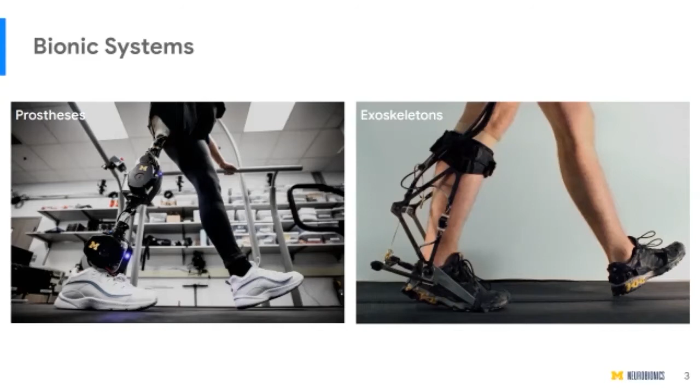Most of the work that I'll be presenting is going to focus on prosthetic legs, but the nice thing about these systems is that they share a lot of similarities in terms of control, and in terms of the types of hardware and software constraints that they have. So although a lot of what I'll be talking about will be focused on prosthetic legs, many of those things still apply to exoskeletons.

The reason I'm super interested in prosthetics is because in the US alone, there are millions of people with lower limb amputations. And these people in general walk slower, get tired faster, fall more often, and develop biomechanical walking patterns that over time lead to other issues like osteoarthritis, osteoporosis, and back pain. In addition to these physical impacts, they also have unseen social impacts - there's social stigma related to having an amputation, and higher rates of depression and unemployment.

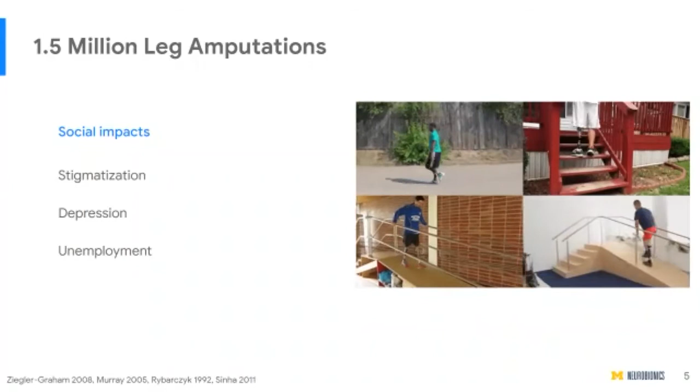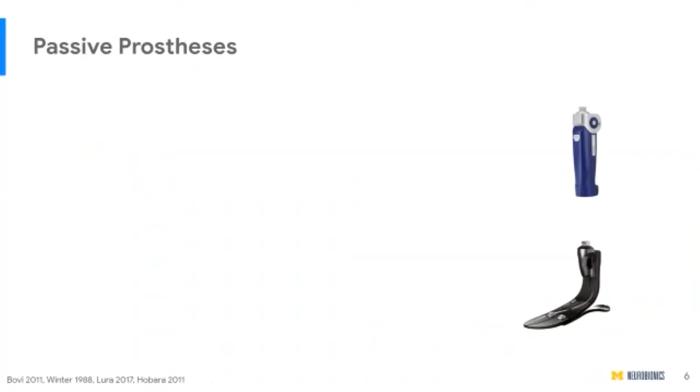Part of the reason why these physical impacts occur is due to the passive nature of prosthetic legs that most people wear. On the right, on top, we see a prosthetic knee, and on the bottom, a prosthetic ankle. The systems you can normally purchase if you're an amputee are passive, meaning they behave like dampers or like springs. What I mean by passive system is that these systems can't generate positive mechanical energy.

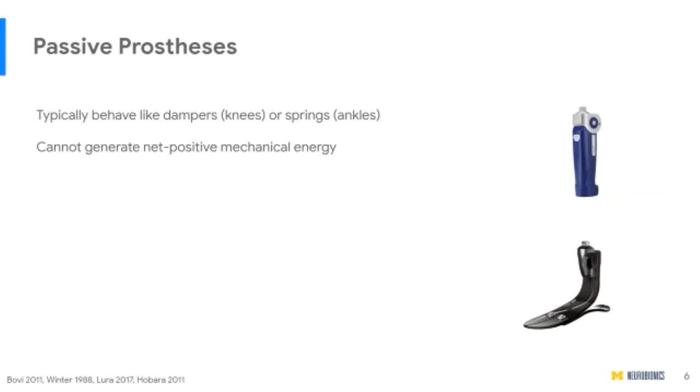A spring, for example, can store, release, and return energy, but it can't create energy. Similarly, a damper can dissipate energy, but it can't generate energy. This is in direct contrast with what the human body does, because we have muscles that can actually generate energy.

For example, at the knee, when you're walking upstairs, the muscles around your knee help generate about 50 joules of positive work. During walking on level ground, the muscles around the ankle generate about 20 joules of positive work.

The fact that these passive systems can't generate any of this positive work leads to amputees having to create different biomechanical patterns of walking. You can see here, walking up the steps, they have to swing their leg around to help get up to the next step. Also, when walking on level ground, amputees generally tend to use a lot more hip motion to compensate for the fact that they don't have this power to push off.

And that's where bionic systems come in. Bionic systems have batteries and motors that can generate positive power.

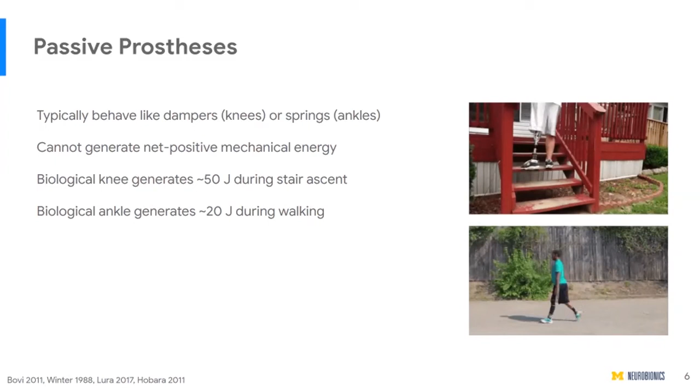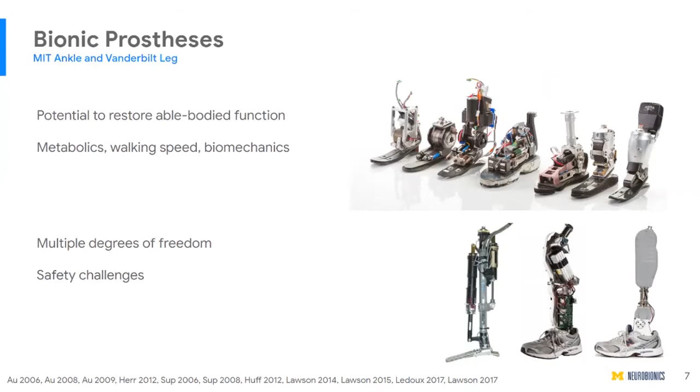The age of bionic systems began about 15 years ago at MIT and at Vanderbilt University. On the top right, we see a series of bionic ankles developed at MIT. On the bottom, we see a couple different iterations of bionic legs developed at Vanderbilt. When I say a bionic leg, I mean both a knee and an ankle system, a full leg system.

Over the years, both of these groups have done a lot of work studying how to design and control these systems. Particularly with the powered ankle system, it's been shown through multiple research studies that a bionic ankle can help restore metabolics, walking speed, and biomechanical walking patterns in amputees, making them closer to and a lot more like a normal person without an amputation.

This is a little bit harder to accomplish on a full leg system because in addition to missing an ankle, you're also missing a knee. Now you have more challenges in terms of controlling and coordinating multiple degrees of freedom. You have more weight to carry with a prosthetic system. And there are additional safety challenges related to—if you make a mistake—the knee could buckle underneath you and you could fall and injure yourself.

Now I'd like to give a big picture overview of how these bionic systems are typically controlled. This is very similar for both prosthetics and exoskeletons—the field tends to split control into three hierarchical levels that all feed into each other.

At the highest level, what the controller needs to do is figure out what the person wants to do—the bionic leg or exoskeleton needs to know what the person is trying to do. The state-of-the-art way to do this is to collect sensor data, which can come from the bionic leg itself or from the person, and feed it into a machine learning model or a heuristic hand-tuned model.

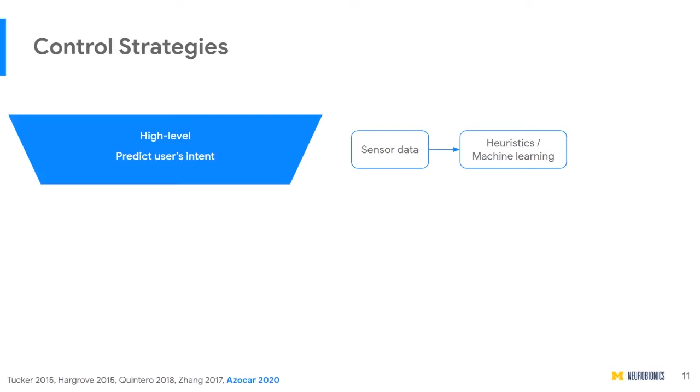We use that model to predict an activity—meaning, is the person trying to walk on level ground, go up or down ramps, or up and down stairs? Once the high-level controller has figured out what activity the person is trying to do, the next step is to send that information to the mid-level controller.

The role of the mid-level controller is to take, for example, if somebody's trying to walk on level ground, that activity and generate the best possible form of assistance. This assistance usually takes three different forms of control: position control, where you're commanding the position of the bionic leg or exoskeleton; torque control, where instead you're commanding the torques and forces the device produces; and finally, in between position and torque control, impedance control.

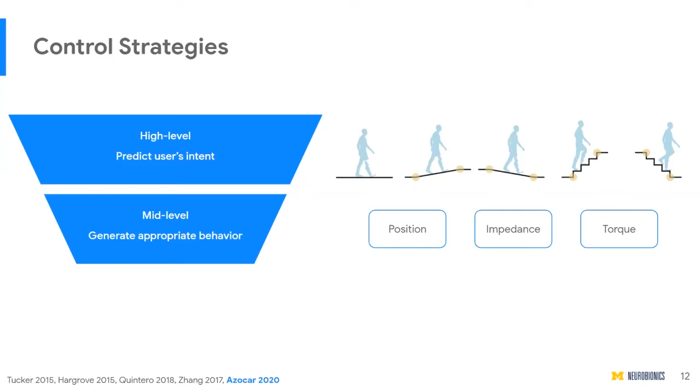I'm going to focus a lot on impedance control throughout this talk, so I'll dive into that a bit more later. Finally, once the mid-level controller has decided the best way to assist somebody for walking up stairs or ramps, it sends the desired actuation to the low-level controller, which actually makes sure this assistance is produced on the motor. This involves more traditional low-level control like feedback control and feed-forward control. One thing about these different control levels is that the field has really focused on the mid-level control.

So how do we best choose a position profile, a torque profile, or impedance parameters? The field has created many different ways of doing this. For example, some groups do optimization, optimizing the torque profiles to reduce metabolic cost, or sometimes we do neuromechanical models where we're trying to model what the human body does with muscles and create torque profiles based on that. But in many cases, we end up doing hand-tuned heuristic controllers where we're just tuning profiles and parameters until we find a pattern of assistance that helps the most.

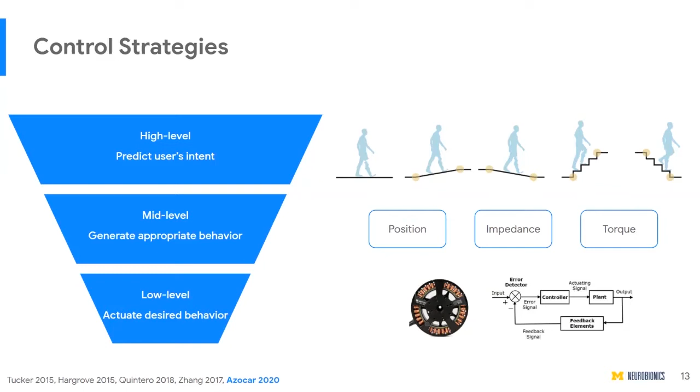High-level control has, in the last couple of years, started to grow a lot in terms of research with the growth of machine learning and artificial intelligence. But the field doesn't really focus too much on low-level control because that's an area of control that has been studied for decades, both in robotics and outside robotics as well.

Although the field as a whole has made tremendous progress in the last 15 years, there's still lots of challenges left to make a real meaningful impact with bionic systems. And I like to divide these challenges into 3 areas: one is hardware, another is controls, and the last is the user perspective.

From the hardware side, the biggest issue is mass. And honestly, all of the other issues, for the most part, somehow relate to mass. A robotic system is heavy - you have to carry the mass of the leg, of the motors, of the batteries. For example, a bionic leg available to buy in the market is 4 to 8 times heavier than passive ankles. So there's a huge increase in mass with these systems.

Another issue is that a lot of these systems that use torque or impedance control don't actually have a torque sensor on them because torque sensors are heavy and big. So what a lot of people end up doing is either use springs as a substitute for torque sensors, or they just don't use torque sensing at all, which leads to some of the control issues where we end up doing open loop torque control or closed loop current control. The issue there is that in many cases, we don't actually know that the output torque of the bionic system is what we want it to be.

Another issue is that hierarchy I showed earlier of high, mid, and low level control - many groups only focus on one of these levels of control, only mid-level or only high-level control. There are very few groups that really span the range of control, so there's not really a seamless transition and seamless communication between different levels of control.

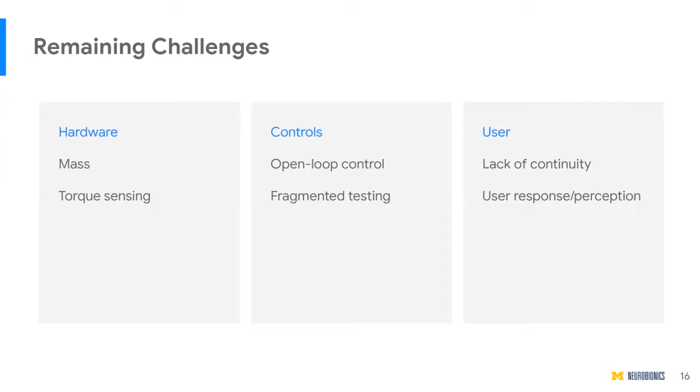So the work I've done over the past 5 years is attempting to start to address a lot of these issues, and I did this in 3 parts. The first part is designing an open source bionic leg. The second part is characterizing open loop control in these bionic systems, characterizing it and improving on it. And finally, looking at the user side - how well people can perceive changes in the properties of these exoskeletons. So this work is a combination of technical improvements in device development as well as scientific exploration.

There's a lot of work in between these 3 studies. I'm going to mostly give a high-level overview of all of these, but feel free to ask questions and I can dive in anywhere.

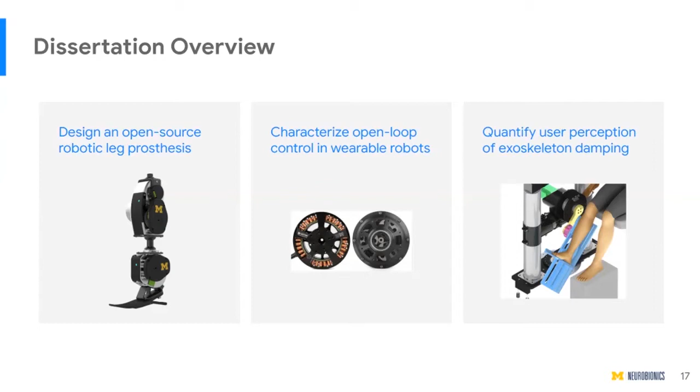So to start off with the open source leg, this has been the biggest push of my PhD over the last 5 years. The goal here was to really create a system to unify the field. We've done this part through the actual design, but also through publications and through dissemination to the public.

I presented this a couple years ago at a Biomedical Robotics and Biomechatronics conference, where I came in as a finalist in the student paper competition and best hardware demo. And last month we were finally accepted into Nature Biomedical Engineering. So it was really exciting to have a robotics paper in a biomedical engineering journal.

I'd like to say that the open source leg, or OSL as I might call it during the talk, has been a huge collaborative effort. I had the privilege of leading this project, but in terms of the design, there were a lot of people involved—Elliott, Luke Mooney, who's on my committee, and Tom Sharkey in Chicago, who all helped design the system.

One of the biggest issues with bionic systems is that it takes a long time to get one working, requiring huge resources in time and money before research can even begin. Even once research is done, these devices have very different mechanical properties and performance, making it hard to compare pros and cons across research groups and control systems. Also, many devices have to be tethered to a power supply or computer, so they can really only be tested on a treadmill or in a closed lab setting. So there are a lot of comparison challenges here.

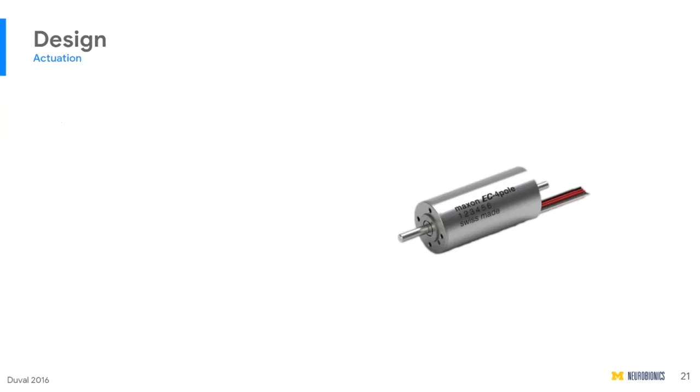One of the highlights of our system is the motor we're using. Historically, bionic systems have used a motor that's long and skinny. Instead, we're using a motor that's short and has a much bigger diameter, because it has a much higher torque density. These motors were originally developed for the drone industry, and because drones can't use transmissions, they have to produce a lot more torque.

The main difference between this motor and the motors previous prosthetic legs use is that this operates at high torque, low speed regimes, whereas previous motors operated at low torque, high speed regimes. In some of my early modeling, I showed that with this motor and a lower transmission ratio, we can be approximately 4 times more efficient than with the other motors.

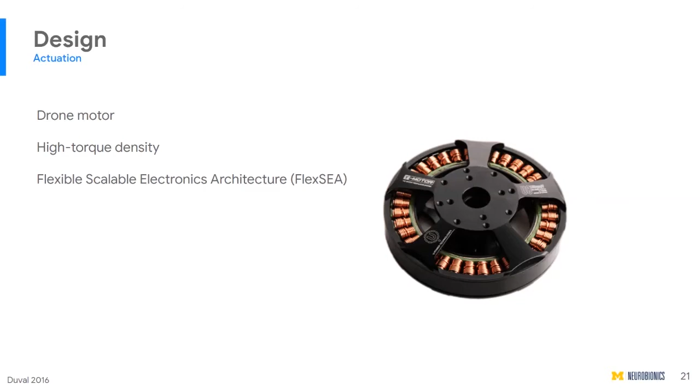With this motor, we teamed up with a company called Dephy, led by Luke Mooney, one of my committee members. They provided the electronics and the low-level motor controller, which is open source, to help us control the system and to help others control the system as well.

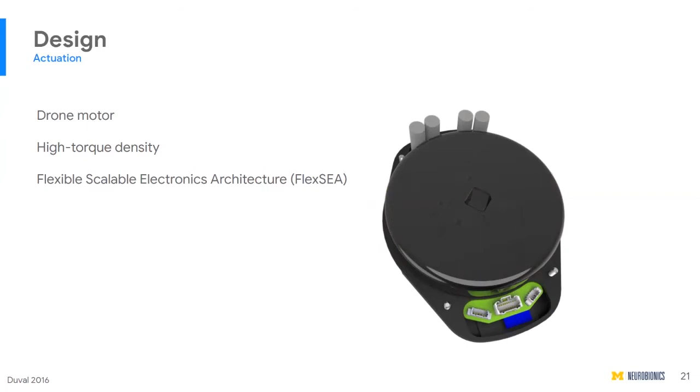I won't go into too much detail on the actual design, but I want to give an overview of the design process. The way we went about designing this leg is, first we started by understanding the biomechanics of human walking—studying what forces, speeds, torques, and positions the human knee and ankle go through across many activities.

We built a computer model of this, and that model allowed us to create a model of what a motor and a transmission would have to do to accomplish those speeds in the prosthesis.

So this was using traditional motor equations and transmission equations where we simulated different transmission ratios, different motors, and different springs. And then this model can also be applied to go from mechanical constraints to electrical constraints as well. So we start from the human body and we end with what the motor has to do in terms of commanding voltages and currents.

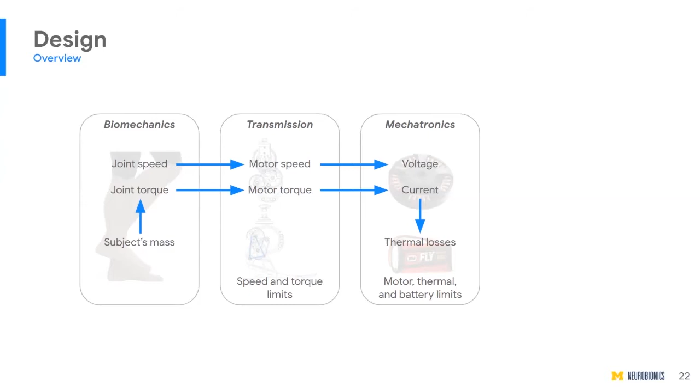And really ultimately what we care about is the thermal losses. As motors produce current, they get hot, and a lot of the limitations in motors have to do with how hot they get. So we want to be able to model the thermal properties of the open source leg. And finally, after all this modeling, is the actual physical design of the leg, where we pick out components and lay them out in the best possible way.

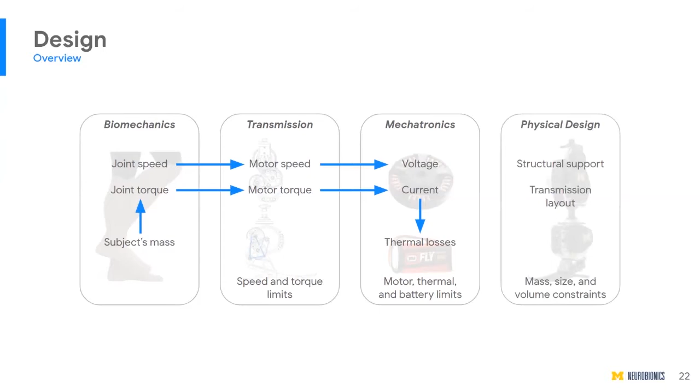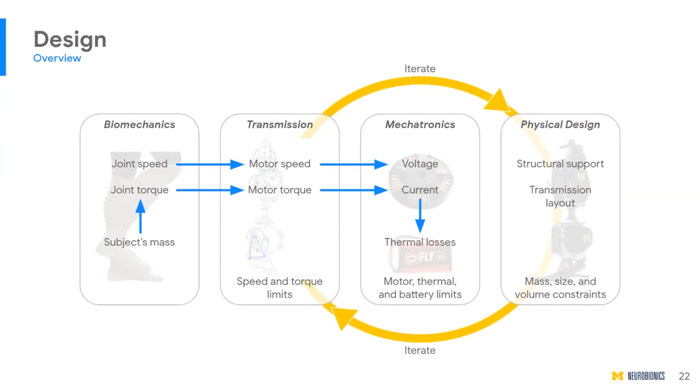I'd like to point out that these last 3 steps are very iterative, and it's a constant push and pull of finding the best compromise between the smallest possible physical design and the best torque, speed, and voltage current operation. So, taking a look at the final design.

On the left we have the knee, and on the right we have the ankle. If we take a look inside, you can see the guts of the leg. One thing I'll point out: because we're using those high torque motors, we have a transmission ratio of about 50:1, which is 2 to 5 times lower than what other prosthetic legs have used.

This is good because lower transmission ratios improve efficiency, mass, and audible noise, so our transmission is quieter than other transmissions. Because it's a low transmission ratio of 50:1, we use a 3-stage belt drive transmission on the knee, and on the ankle we have a 2-stage belt drive with a 4-bar linkage.

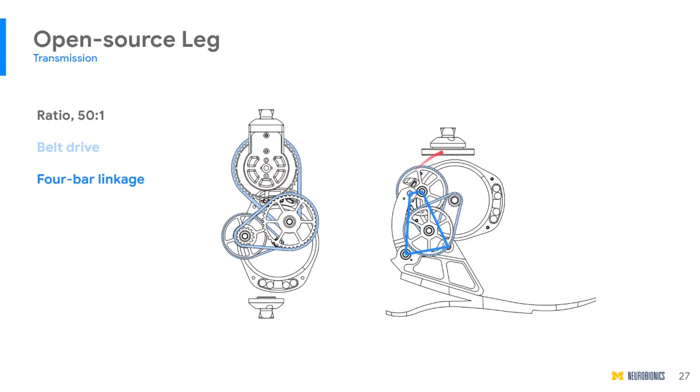Here you can see what the belt drive looks like as the knee is moving, with all 3 stages rotating. We also have a battery compartment in both the knee and ankle to allow people to test untethered from batteries external to the leg.

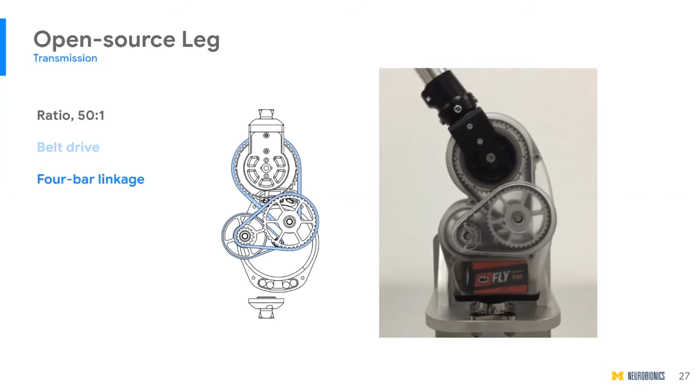Now moving away from the design and looking at benchtop testing to really characterize the performance of the leg and how well it performs, I ran a series of tests. This is just some of them.

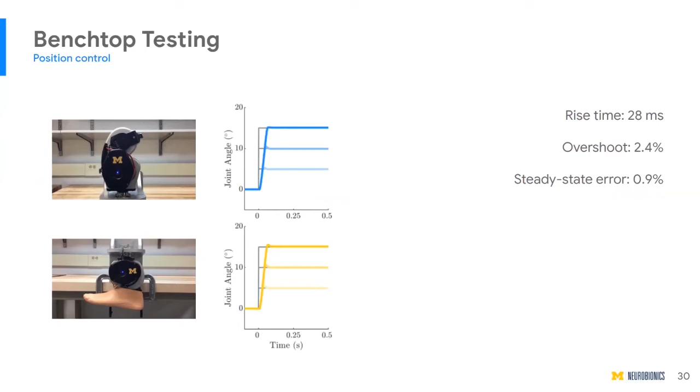First was looking at how well we can perform in position control. On the left top you see the knee moving to different positions, and on the bottom you see the ankle moving to different positions. These are traditional step response tests, where we want to see how quickly and how well we can get to a desired position.

I also ran frequency response testing, a different type of test where the knee and the ankle are commanded to track a high frequency noise signal. Using that, we can characterize the frequency response, or Bode plots, of this system. The main takeaway is that the knee and ankle have a bandwidth of between 11 and 20 hertz, which is higher than some other prosthetic legs.

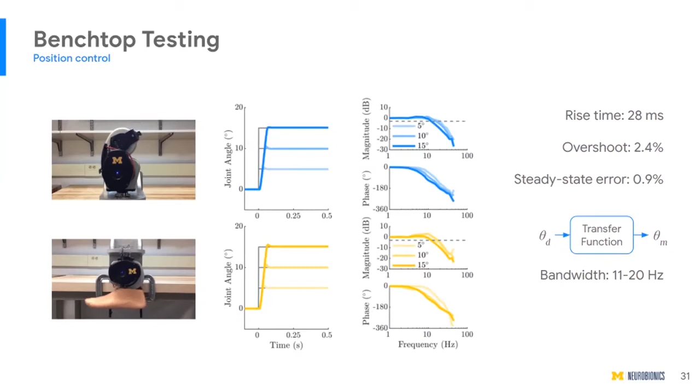It's about 5 times higher than the bandwidth of the human body, which means the takeaway here is that we are more than capable of recreating the motions in the relevant frequencies of human walking.

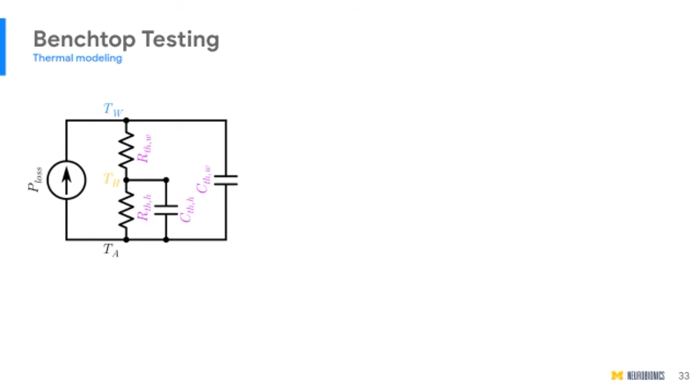The analogy between the thermal domain and the electrical domain is that temperatures become voltages and heat flow becomes current. In this case, the input heat flow is the power loss due to the current produced by the motor. This I squared R is the current that the motor is producing multiplied by the resistance of the motor, which produces the thermal power loss.

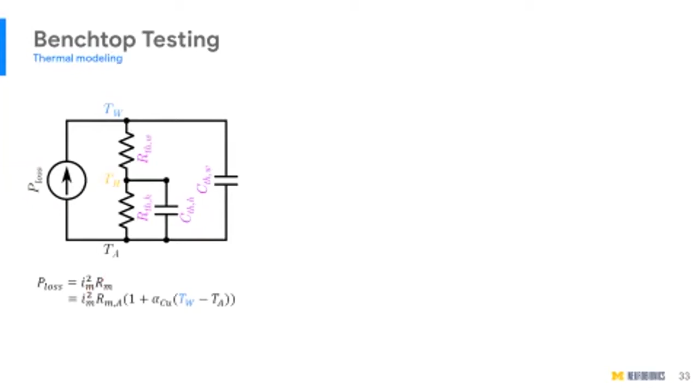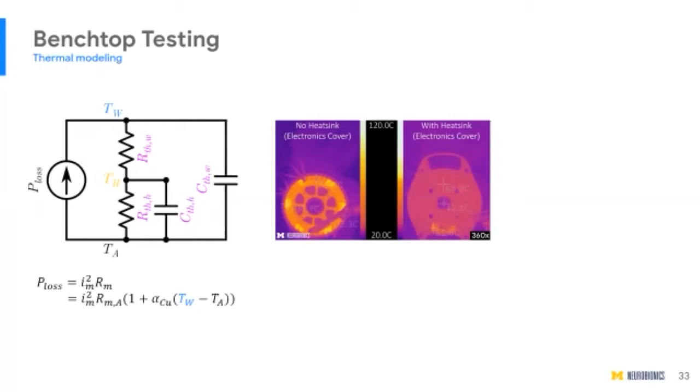And then we can model that. So we ran an experiment. Here we see 2 videos, these are thermal images of the knee where I commanded a constant current. Over about an hour and a half, I measured how hot the motor winding got, as well as how hot the housing of the leg got. The goal was to characterize and find these 4 purple parameters, which are thermal resistances and thermal capacitances of both the motor and the housing.

The way we did this is using these thermal images, we measured winding temperature in blue. We measured housing temperature, and we also knew ambient temperature. Using these measurements, we created an optimization that would find these 4 parameters.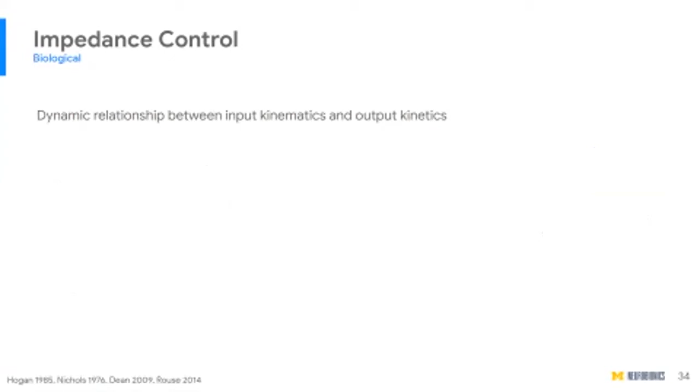Moving on to getting closer to real testing on people, we decided to use impedance control for the open source leg. In the human body, impedance is a powerful biomechanics tool because it describes how the body reacts to disturbances, as well as how energy is stored in joints and how energy is transferred from the ground up through your body when there are perturbations.

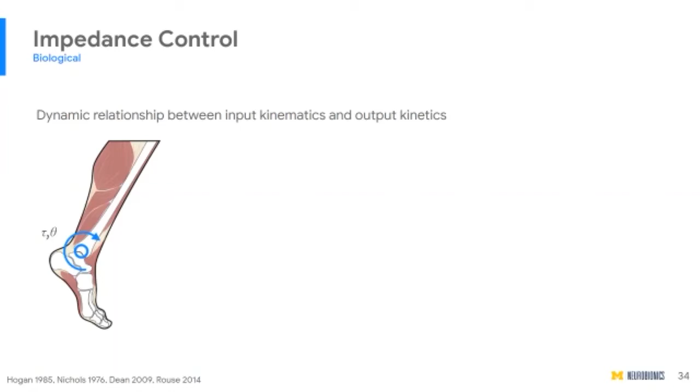Essentially what impedance is, it's this dynamic relationship between the input kinematics and the output kinetics. What I mean is it's the relationship between positions, velocities, and torques. Our group, as well as other groups, have spent a lot of time characterizing and measuring the impedance of the human body. For the ankle, for example, we can approximate the impedance of the human ankle with a stiffness and a damping term, and also, in many cases, an inertia term. But in general, when I talk about impedance throughout this presentation, just think stiffness and damping, think of springs and dampers. That's really all I mean when I'm talking about impedance control.

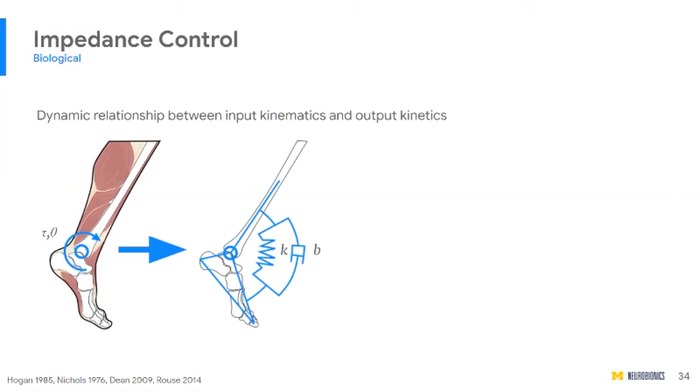So how do we transfer this impedance model into a prosthesis? What we do is we have this equation, which basically says that the torque that the prosthetic leg has to produce is a function of stiffness multiplied by a displacement and damping multiplied by a velocity. Essentially, what the prosthesis is behaving like is a damped spring.

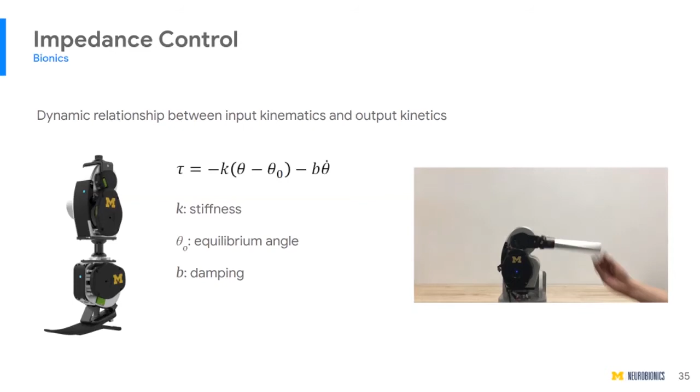This is a video that my lab mate Eunhee took of the knee operating in impedance control. As you can see, as he interacts with it, it kind of returns to its original position in a spring-like manner. Using this controller, and splitting up the gait cycle into many phases, we're able to recreate natural walking patterns. I'll show you kind of what that looks like.

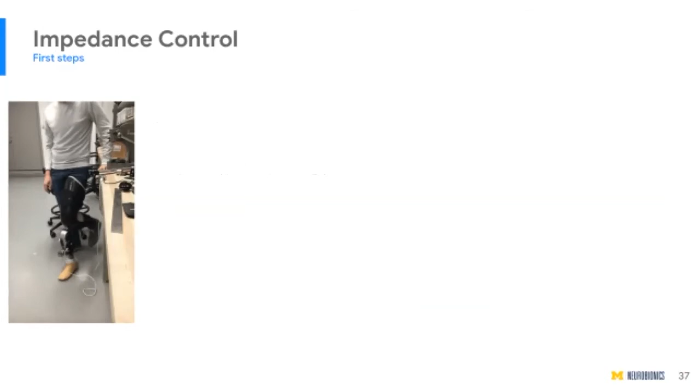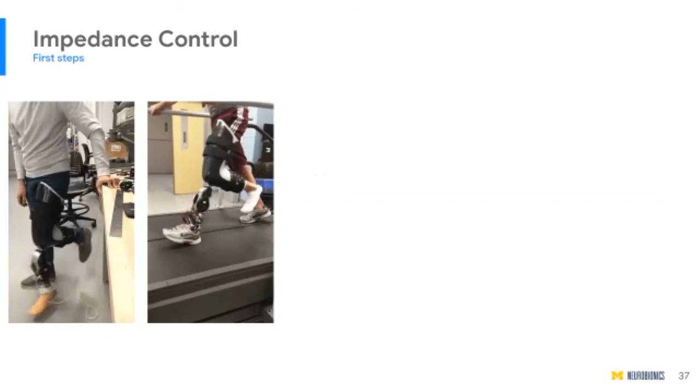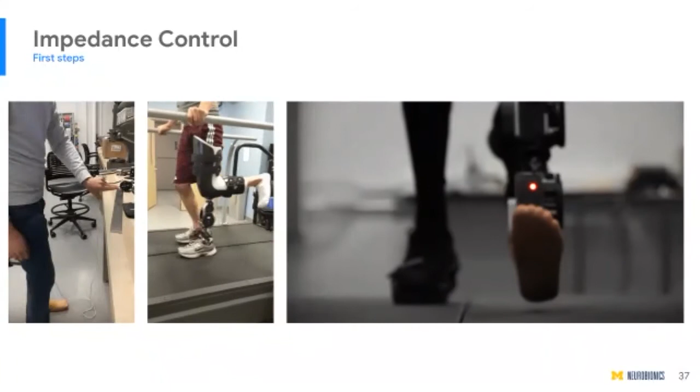Then the next day, I got a little bit more adventurous and started walking on the treadmill, still with just the knee. But as you can see, this is still a very unnatural walking pattern. Over a couple tuning sessions, we can get to a much more natural walking pattern. This is using impedance control, splitting up the gait cycle into multiple regions and doing a lot of tuning. This was about 24 parameters or 24 knobs that I had to tune, as well as 7 transition criteria that I had to tune to get a natural walking pattern like this.

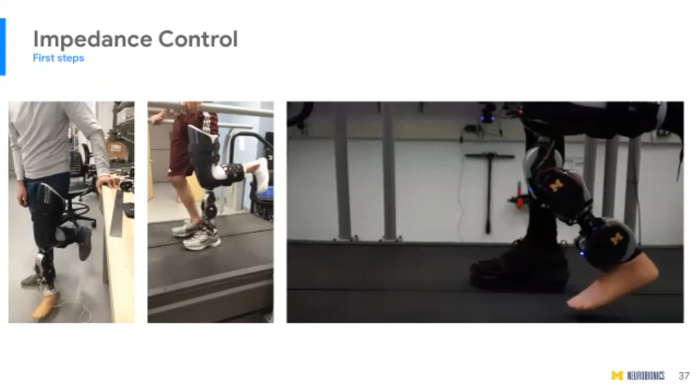I want to point out that I did a lot of testing on myself beforehand. I'm wearing this adapter that's basically a cast that simulates myself having an amputation. So I did a lot of this testing on myself first before moving on to testing it with actual patients.

But here's a picture of our first patient, kind of getting her set up. Basically what I did is I took the controller that I implemented for myself and applied it to her. Whenever I tuned it on myself, it required multiple days of tuning, but starting with my parameters and moving it onto her only took maybe 30 minutes of tuning to get it to the point where she could walk naturally. So that looks a little bit like this, I think.

I want you guys to hear what it sounds like when people are walking. As you can see, she has a pretty natural walking pattern. This was after about 30 minutes to an hour of walking with the open source leg.

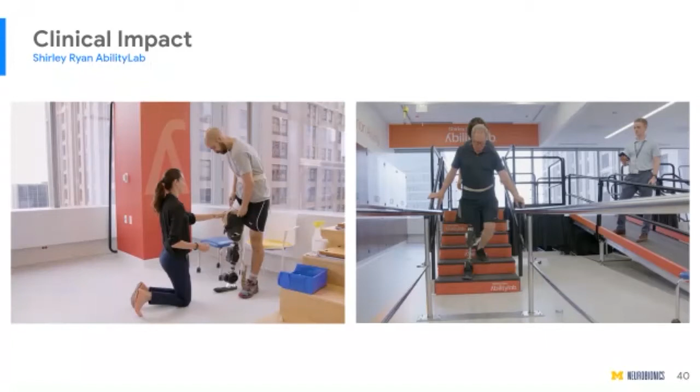Our collaborators in Chicago at Northwestern University have taken the open source leg and run it through more rigorous testing with patients. They've had multiple patients, and in addition to walking on level ground, they have a circuit that lets people walk up and down stairs as well as up and down ramps.

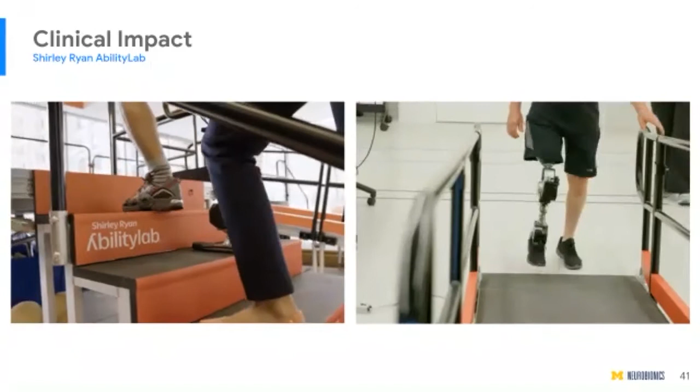They also use impedance control—the same impedance control that I showed before—and they use a combination of hand-tuned controllers like I showed, as well as some more biologically inspired controllers.

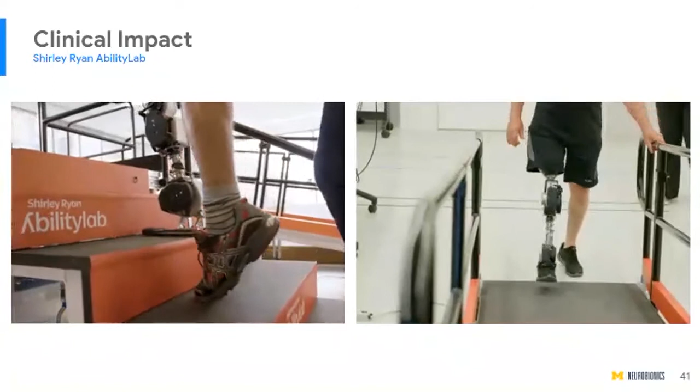This group is one of the few that does both mid and high level control. As part of the open source leg project, we're going to open source some of the high level controller to begin helping other groups integrate mid level control with high level controllers.

To close this off, the contributions of the open source leg so far: when we were working on this leg, we were the first bionic leg to use drone motors, which allowed us to have a much lower transmission ratio.

Since we started working on the open source leg, other groups, including Bobby's group who's on my committee, and other groups at MIT, have also begun to use drone motors, both on prosthetics and exoskeletons, which I think is a good sign for the field that these motors have a lot of potential for future use.

Because we use these motors, we're also able to save a lot on mass. Compared to similar devices with similar performance characteristics, the open source leg weighs 20% less. We got it down to $10,000 to $30,000, which might seem like a lot, but a single bionic ankle available on the market costs closer to $100,000.

So this is $30,000 for both the knee and ankle versus $100,000 for just the knee or just an ankle. Really the main contribution was that we basically open sourced everything—the hardware, the software, the controls, as well as all the clinical data we've collected. We have open sourced that.

The goal, as I mentioned before, was to unify experienced researchers and to allow new researchers to come in. Part of the way we've done that—this has been myself, in addition to many other people in the lab, I have lots of lab mates to thank for this—is we've done a lot of live demos at different conferences and events.

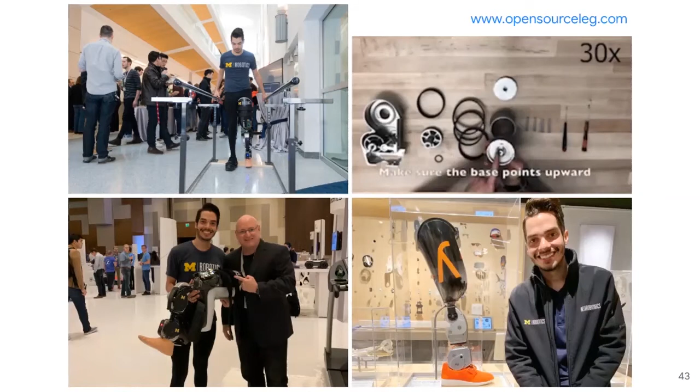We have a website, opensourceleg.com, where you can find all the parts to build this and all the instructions to control it. I think two of my favorite memories of going out and sharing the open source leg...

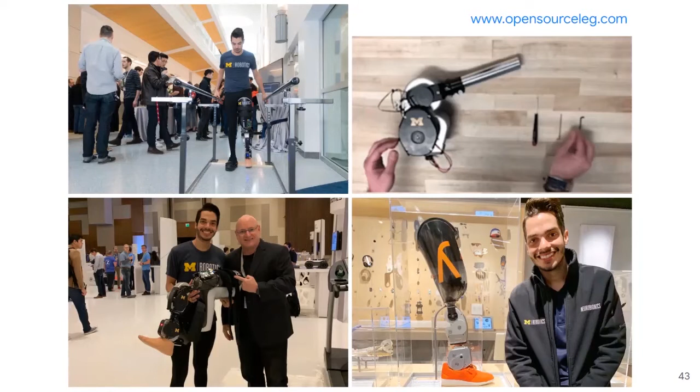On the bottom left, that's me with astronaut Scott Kelly. As many of you know, in a previous life I was an aerospace engineer, and astronaut Scott Kelly asked if he could walk on my leg. He was one of the first people outside of our lab that I was confident enough in to let him walk on the leg. That was a cool combination of my previous career and my current career coming together into one.

On the bottom right, that is the open source leg on display at the Museum of Science and Industry in Chicago. It was really cool to get to go to a museum and basically see my PhD on display.

Myself, as well as many other lab mates like Unki, Kim, and Ennis, have all spent a lot of time over the last 2 to 3 years really trying to get the word out, trying to disseminate the open source leg and really unify the field. I think we're doing a pretty good job.

In the last 2 years, these are all the institutions that have begun using the open source leg—a combination of both experienced and new researchers. Universities like Northwestern and Carnegie Mellon have a long history in working with bionic legs.

And these groups are actually replacing their old system with the open source leg. Groups like University of Washington and Imperial College London have done a lot of modeling and simulation work but didn't have a system to actually prove their work with. Now they're building the open source leg, and hopefully over the next couple of years we're going to start to see lots of results from different institutions using the open source leg.

So moving on to a slightly different topic. This is work that builds off the drone motors that the open source leg uses. Because these drone motors are only now beginning to be used in bionic systems, they haven't really been tested and their performance isn't very well understood. So I ran a series of experiments to begin to understand the performance of these systems, especially with transmission ratios. But I'm really only going to focus on one for this talk, which is characterizing the impedance controller in open loop.

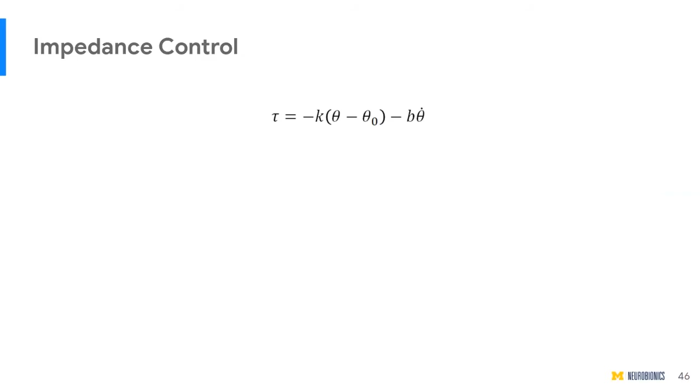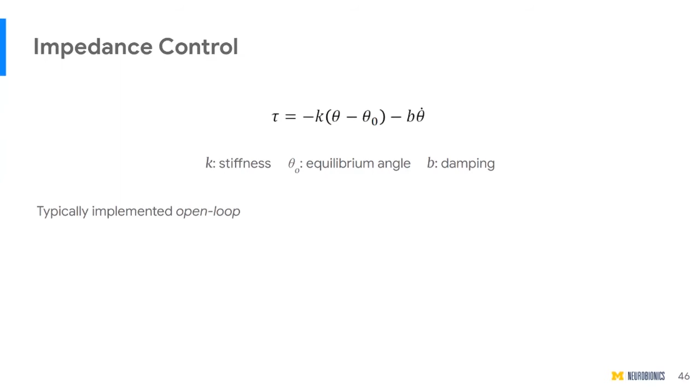As I mentioned before, this is the type of control that a lot of bionic systems use - impedance control, where what we care about is commanding a stiffness and a damping value. Because we don't have torque sensors to measure this torque value, these systems are typically implemented in open loop, where we don't know the actual output torque. We can estimate it, or have a model based on motor current for what the output torque is. But with an impedance controller, we don't actually know for sure what the output stiffness and damping values are. So we might think we're commanding a stiffness of 10 Newton meters per radian, but we might actually be commanding a stiffness of 8 Newton meters per radian.

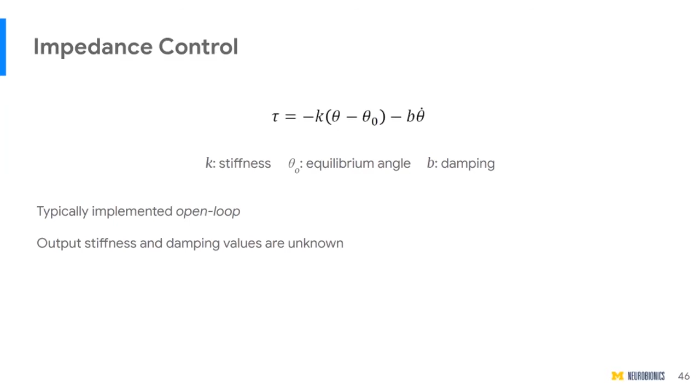And in some cases that error matters, especially in research settings. So the goal of this study was to use system identification techniques to identify the output impedance parameters of these actuators used in bionic systems - really, I want to measure the stiffness and damping values of these systems.

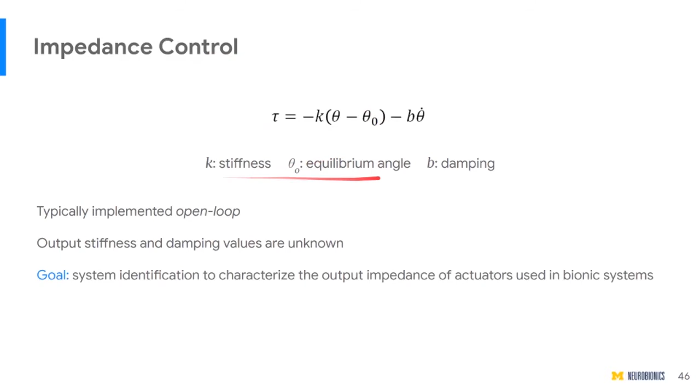I did this with two different experiments. The first was using the motor on the open source leg, so just the motor on its own. The next study was basically that same motor but with a transmission attached to it, so with gears attached. I used a 6-to-1 motor and a 9-to-1 motor.

What that experiment looks like is you have two motors that are connected. One motor, which I'm calling the driven motor, is operating under impedance control, so it's commanding a stiffness and damping value, while at the same time a separate motor is providing position perturbations. These position perturbations are white noise perturbations, similar to those I showed earlier during the OSL testing. While the motor is being perturbed, we have a torque sensor in between measuring the response torque of these perturbations.

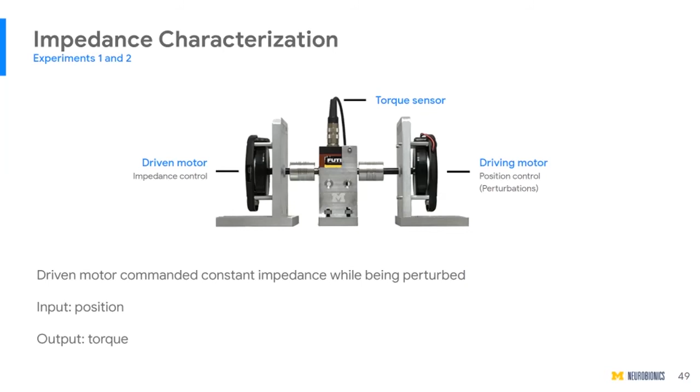So we have a torque sensor here in this benchtop testing, but normally under normal operation we wouldn't have a torque sensor. In this test, even though we have a torque sensor, we're not using it for control, only for measurement. This is a video of what that experiment looks like.

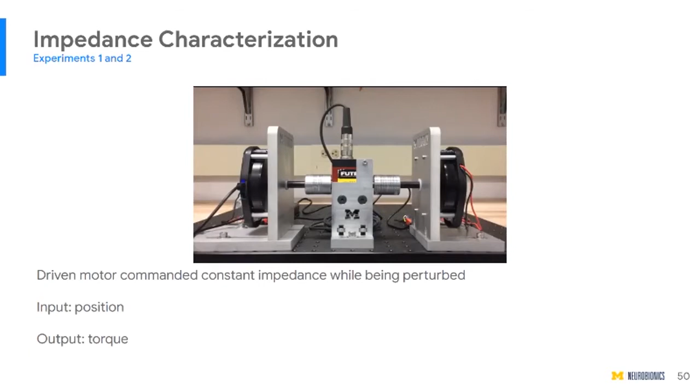The input to our system is our positions, velocities, and accelerations, and the output is a torque. Using this input and output information, we can do our characterization. What we want from this characterization is this model - this transfer function that converts positions to torques. That uses this equation, basically inertia, damping, and stiffness. So we want to actually calculate these three I, B, and K values.

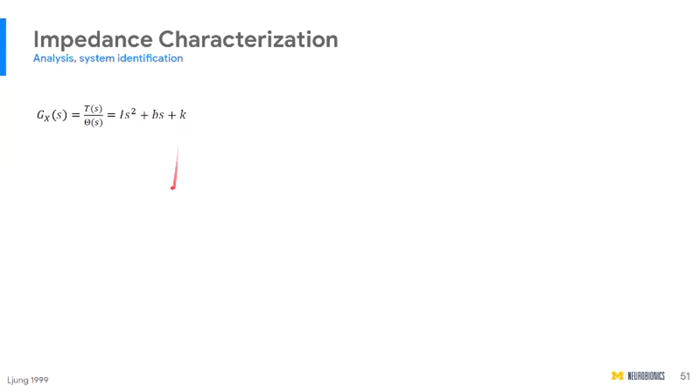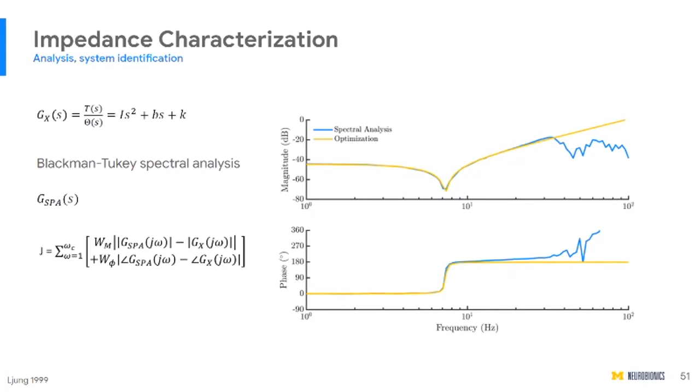So the results of this testing, let me walk you through some of these plots. Here we have output stiffness versus desired stiffness, and on the bottom, output damping versus desired damping. This is for the direct drive controller, so without a transmission.

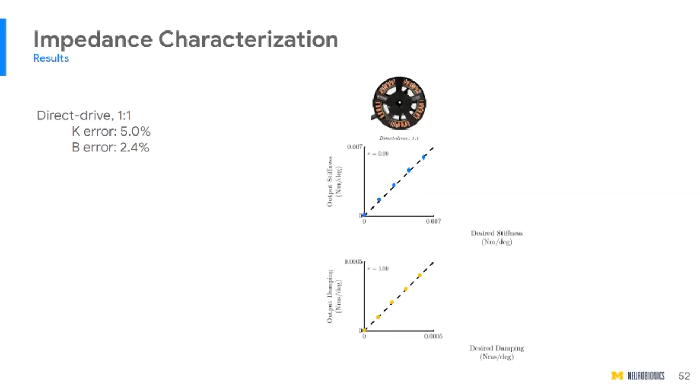The black dashed line essentially denotes a perfect relationship between the desired stiffness and damping and the actual measured stiffness and damping. The closer we are to this black line, the better we are at doing open loop control. With just the motor, we basically fall directly on that line, and that makes sense because...

there is no transmission, and motor current does a very good job of approximating motor torque. But as we add a transmission, for the 6-to-1 transmission, we begin to see losses where the output stiffness does not match the desired stiffness as well. And with the 9-to-1 motor, we see these losses increasing.

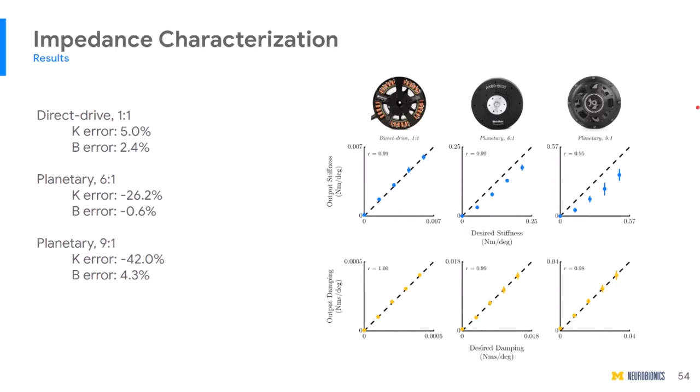With this information, one thing I want to point out is that even though there are losses, these losses are still linear. So we can provide a very simple correction factor once we've done this characterization to get more accurate open loop control, simply by multiplying the desired value by a correction factor.

Some takeaways here are that a motor without a transmission is capable of doing accurate open loop impedance control, but adding a transmission creates a mismatch between the desired and actual output impedance. But that's okay, because once we've done our characterization, we can account for those losses and improve impedance control. The main contribution is that I formally outline methods in the paper I'm working on to actually characterize this.

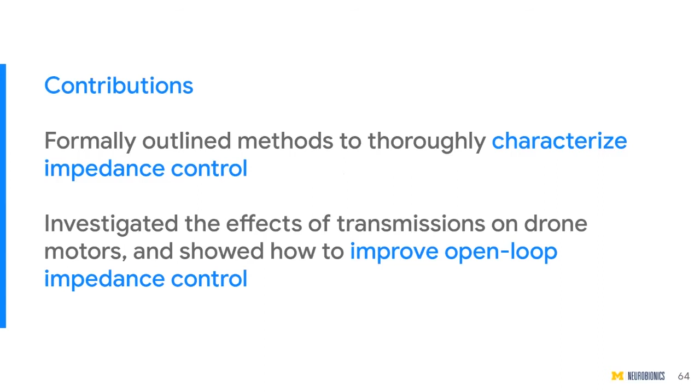Hopefully other groups can in the future also characterize their systems thoroughly. I investigated the effects of transmissions and showed how even with open loop impedance control systems, we can still have accurate output impedance. Part of this is possible because we're using these drone motors that have low transmission ratios—this would be harder to do with motors that have higher transmission ratios.

Now looking at a different side of bionic systems, focusing more on the user perspective, I'm interested in understanding how well people can perceive changes in the assistance that an exoskeleton is providing them. That was the purpose of this study, looking specifically at damping perception.

In this work, I published and presented at a biomedical engineering conference, and came in second place in the student paper competition. It was also accepted in a journal on neural systems and rehab engineering.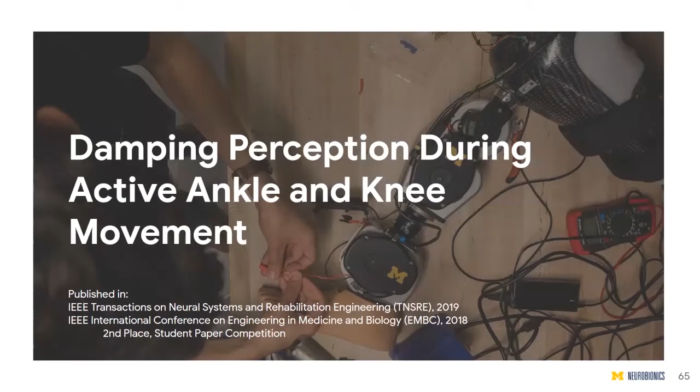Going back to impedance, our lab over the last 5 years, even before I joined and when Elliott was a grad student, has focused a lot on different aspects of impedance. For example, we've measured the impedance of the human body during walking, both for healthy patients and for patients with stroke, for walking and running.

We've also looked at impedance regulation—how well somebody can actively change the stiffness of their ankle. What I'm particularly interested in is impedance perception: how well can somebody perceive the changes in the stiffness or damping properties, not of their own body, but of an exoskeleton or external device attached to their body?

There's a couple reasons why I'm interested in perception in particular. One is the implications perception has for the sensory motor system—the idea that if you can sense it well, then it matters. An example is touch: we are very good at discriminating touch with our fingers, much better than with our back. This shows touch is super important at the fingers because we do a lot of manipulation and require a lot of dexterity there, but not necessarily so much with our back.

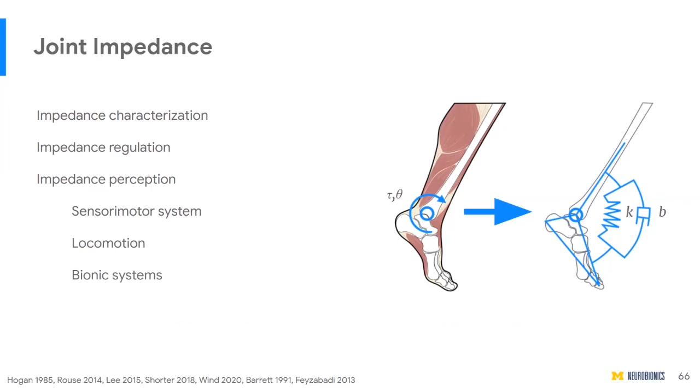The goal of this study was specifically to quantify how well people can perceive changes in damping, this B value, both at the knee and the ankle. During my master's degree at Northwestern, my first study was looking at stiffness perception, how well people could perceive changes in stiffness. This study kind of builds off of that and completes impedance perception by looking at both stiffness and damping.

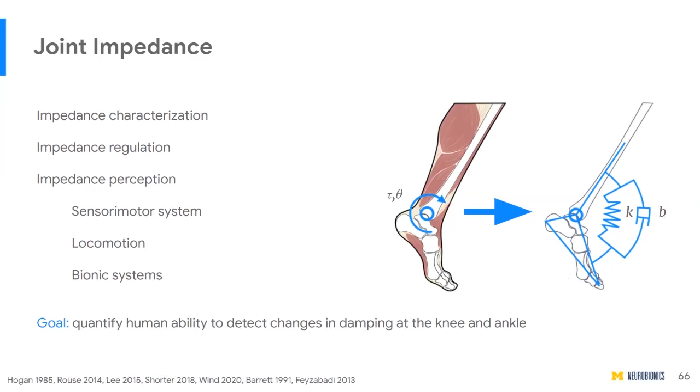The setup we did here: we didn't have an exoskeleton for this study, but we had this big dynamometer, which we can essentially control to behave like an exoskeleton. On the left, we have people seated with their ankle connected to the dynamometer motor. On the right, we have subjects seated connected with the dynamometer on their knee. We controlled it not with impedance control, but with admittance control, which is essentially the inverse of impedance control. So here we're still commanding stiffness and damping values.

What we did is we implemented a psychophysical method that would help us understand how well people could sense when I change the damping values of this controller. These psychophysical methods have been used a lot in other fields, understanding how well we can sense changes in sounds or in visual cues, as well as in touch.

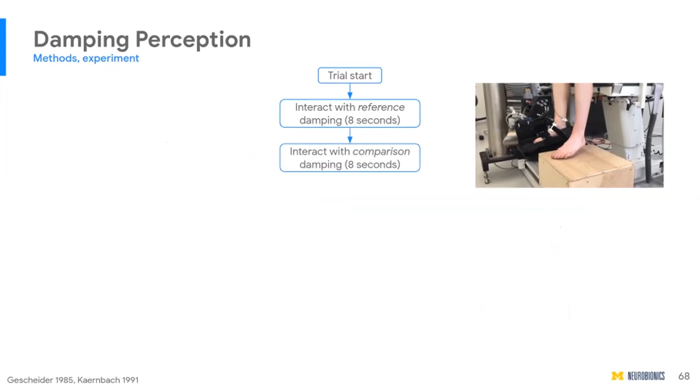What this experiment looked like: at the beginning of the trial, subjects would interact with this controller, which had a certain damping value. After about 8 seconds of them interacting with it, here's a video of somebody interacting with the motor, I would change the damping value, either increasing or decreasing it, and in some cases keeping it the same. Then I would ask the subjects after another 8 seconds, did the system increase damping or decrease damping?

If they were correct, then on the next trial, the two damping values would get closer together. If they were incorrect, the next trial the two damping values would get farther apart. So essentially this experiment gets harder the better you do, and gets easier the worse you do.

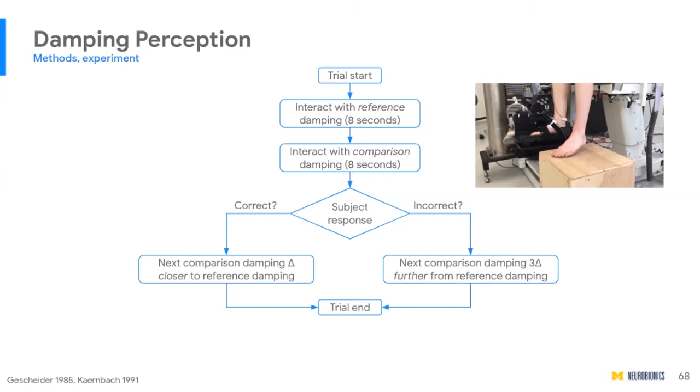We would basically repeat this process over and over across both the knee and the ankle and across multiple damping values. We used a method called the weighted staircase method that converges to a number called the Weber fraction. The Weber fraction represents the percentage in a stimulus that you can sense reliably, so in this case, the percent change in damping that people can perceive with 75% accuracy.

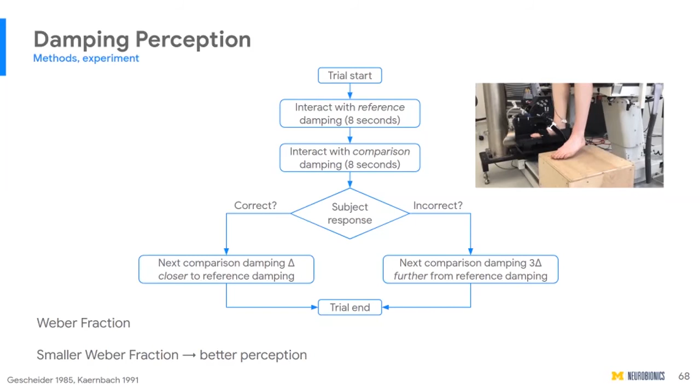A Weber fraction of 0.1 means that I need to change damping by 10% for you to be able to perceive that change. The smaller the Weber fraction is, the better you are at perceiving the number, because it means you can perceive a smaller change in that parameter.

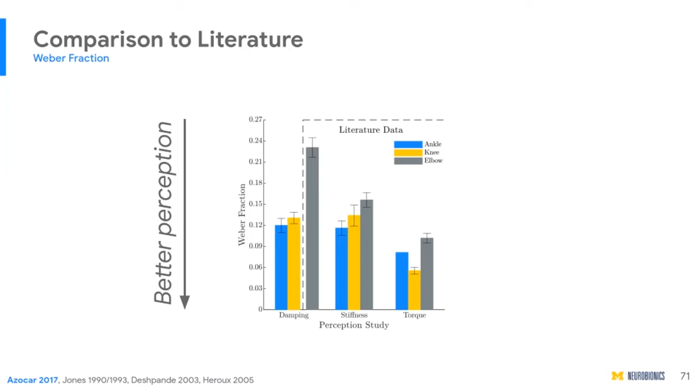So one, we're better at torque perception. The second takeaway is that stiffness perception, the second set of bars, is approximately the same across the knee, ankle, and elbow. But that is not the case for damping - we're much better at perceiving changes in damping at the lower limb than at the upper limb.

So restating these things: both damping and stiffness need to change by about 12 to 13% at a minimum to be perceived reliably. We have better impedance perception at the lower limb than at the elbow, and that impedance perception is worse than torque perception. So what does this mean?

The one thing I want to point out is that stiffness and damping perception were similar at the lower limb, which was surprising since we expected damping perception to be worse, like in the upper limb. The fact that both are similar suggests that both parameters are important in the lower limb for the sensory motor system. So if you're interacting with an environment, whether it's the ground or an exoskeleton, both the stiffness and damping properties of that environment are important.

A separate point I want to make is that the field has focused a lot on investigating the effects of stiffness on walking, biomechanics, metabolic cost, and many other parameters related to the user. But there's been much less work looking at how damping affects locomotion and biomechanics. So I think this is a call to action that maybe we need to focus on damping just as much as stiffness.

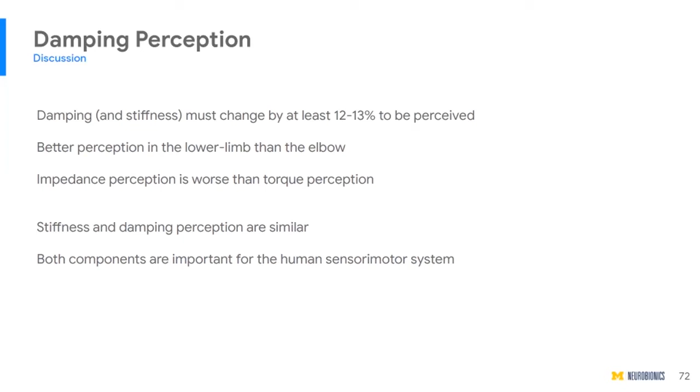So the main contributions of this work: one, we found a perception threshold that can be implemented in bionic systems. An example of how this could work is if you have an exoskeleton operating with impedance control and you want to change its parameters without interrupting or disrupting the user, make sure those changes remain below that perception threshold.

The second takeaway is that this study, along with my master's thesis, completed the first set of studies that actually looked at impedance perception in the lower limb. Up until now, there was a lot of work on stiffness and damping perception in the upper limb, at the elbow and especially the hand and fingers, but there were no studies looking at impedance perception in the knee or ankle.

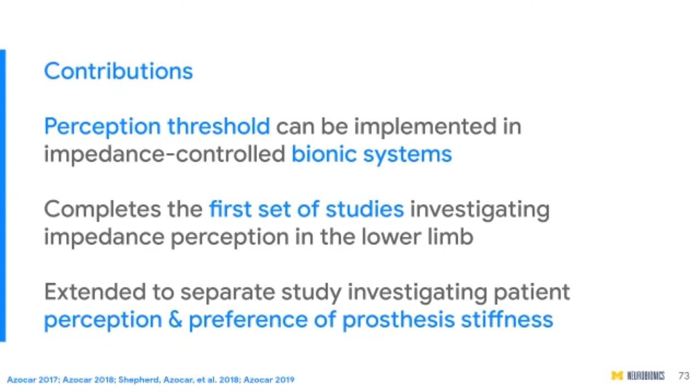So this is the first set of studies. In a way, it's laying a foundation for a wide range of studies looking at perception in the lower limb, and we've begun to see that, especially in our lab. With one of my lab mates, Max, who graduated last year, we took this work and extended it to amputees, looking at how well they could perceive changes in the stiffness of their prosthetic ankle. Additionally, other lab mates of mine are now looking at other forms of perception with exoskeletons during walking.

So to close everything out and bring everything back together, the main contributions of my work were: one, to develop, test, and disseminate the open source leg, and to begin unifying and expanding the field of bionics.

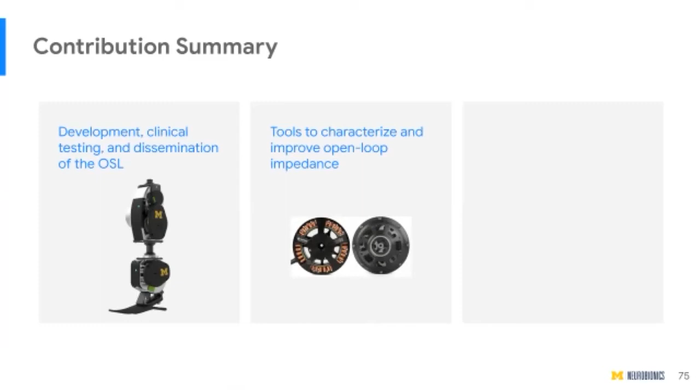Two was to create tools to characterize and improve open loop impedance. In addition, I ran a series of other studies to further understand how these drone motors operate with transmissions.

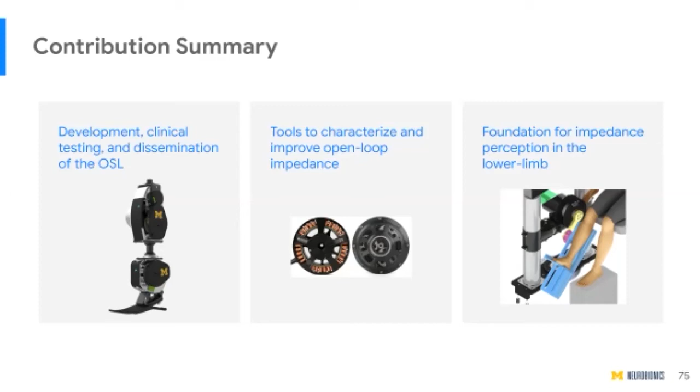And finally, to really begin to set the foundation for perception studies and for more user-focused studies with exoskeletons in the lower limb. And I was able to accomplish this in multiple ways.

In terms of first author papers, between my master's and my PhD, I've had 3 first author papers published, and we're wrapping up our 4th one that will hopefully be submitted by the end of the month. And then a second author journal paper, which was that perception paper with amputees. I've been able to do lots of other things during my PhD.

Some other highlights: last year I helped Elliott develop and teach a new graduate level class focused on design and control of bionic systems. A lot of the design work that I skipped in this presentation, we delved a lot more deeply into in that class. And then I spent the last year and a half working at Google.

I've been able to take a lot of the skills that I developed throughout my PhD, and they've all come together at Google. And as Elliott mentioned before, I've been very lucky to have lots of fellowships that have funded my research and given me a lot of freedom to really explore what I wanted to explore during my PhD. So I want to thank the National Science Foundation, the GEM Consortium, and University of Michigan for allowing me to have the freedom to explore during my graduate career.

And I also came close to getting a few other fellowships like the Hertz, the NDSEG, and the Ford Fellowship. And finally, as I mentioned, we spent a lot of time presenting at conferences, and I've had lots of luck at conferences between student paper competitions and hardware demonstrations.

Maybe I'll start with one to kick things off, and then I'll hold the rest of my questions—so somebody be thinking of their next question. My question for you is, do you think that the damping perception from the knee and the ankle are the same or different? Both of your studies show slight differences in the response, but then also there's uncertainty in those metrics. So do you think those are different or the same? As in, are we better at one joint than we are at the other?

Yes. So in my work, no, we didn't see any differences. I think part of the limitation is that we were in a seated position. I think if you were to start doing this testing with an exoskeleton while people are walking, doing more dynamic tests, then you can really start to tease out the differences. And I think you would end up seeing—this is a hypothesis—better perception at the ankle than you would at the knee. But that's something that hasn't been tested yet.

Hey Alejandro, can you hear me real quick? Yeah. Hey, this is Mal. Congratulations on the defense, that was pretty awesome. I like the presentation. Just to follow up on Elliott's question real quick, are you aware of any impedance perception tests or experiments done on athletes?